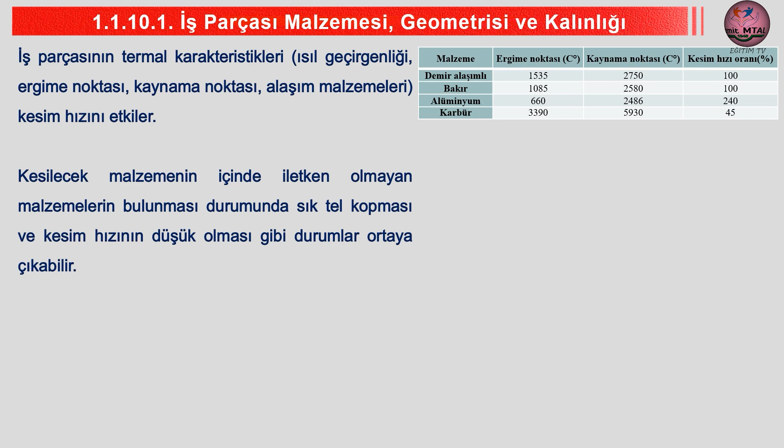İş parçası malzemesi, geometrisi ve kalınlığı ile iş parçasının termal karakteristikleri kesim hızını etkiler. Kesilecek malzemenin içinde iletken olmayan malzemelerin bulunması durumunda sık tel kopması ve kesim hızının düşük olması gibi durumlar ortaya çıkabilir. Demir alaşımlı malzemelerde kesim hızı yüzde 100 kabul edildiğinde diğer malzemelerin hız oranları tablolardaki gibidir.

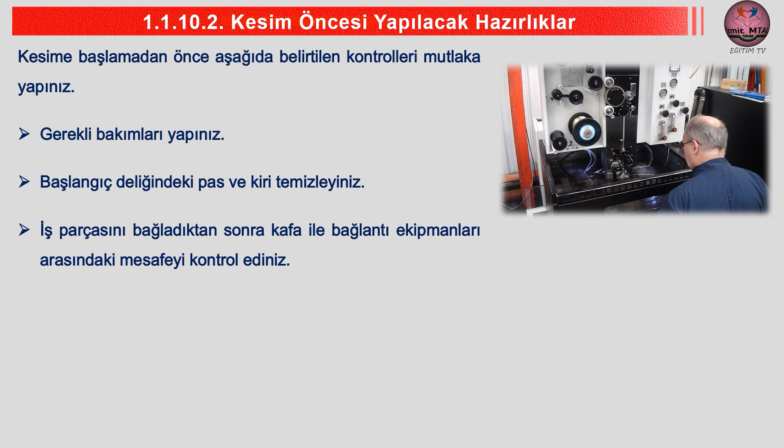Kesim öncesi yapılacak hazırlıklar. Kesime başlamadan önce aşağıda belirtilen kontrolleri mutlaka yapınız. Gerekli bakımları yapınız. Başlangıç deliğindeki pas ve kiri temizleyiniz. İş parçasını bağladıktan sonra kafa ile bağlantı ekipmanları arasındaki mesafeyi kontrol ediniz.

Kullanılacak kesim şartına göre uygun nozul türünü seçip iş parçası ile alt nozul arasındaki mesafeyi ayarlayınız. Kafaları başlangıç noktasına alarak telin geçip geçmediğini kontrol ediniz. Z eksenini pozisyonlayınız ve mutlaka limit koyunuz. İş parçasının koordinatlarını ayarlayınız.

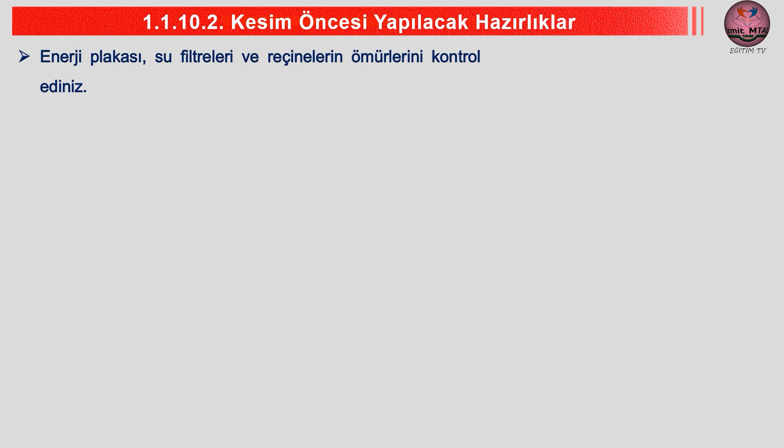Enerji plakası, su filtreleri ve reçinelerin ömürlerini kontrol ediniz. Tank seviyesini cetvelden kontrol ediniz.

AC Function menüsünde uygun tekrar deneme ve RWB modunu seçiniz, elektrik koruma durumunu kontrol ediniz. Elektrik kesintisi durumunda tezgah açıldıktan sonra makine referansına gideceğinden, bu hareket esnasında kafaların iş parçasına ya da bağlama ekipmanlarına çarpmayacağından emin olunuz.

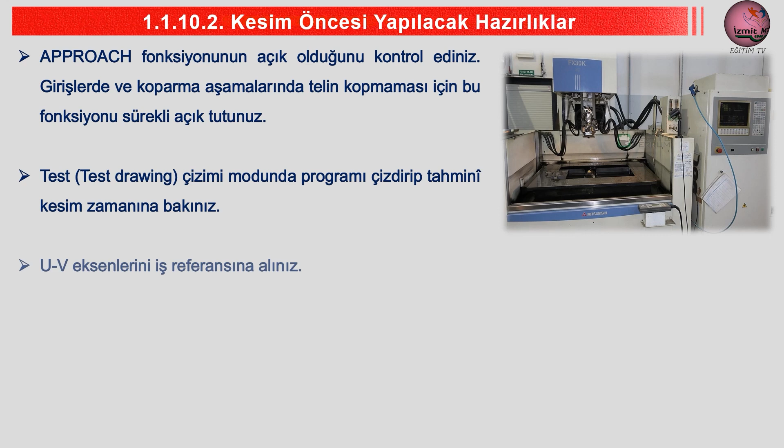Approach fonksiyonunun açık olduğunu kontrol ediniz. Girişlerde ve koparma aşamalarında telin kopmaması için bu fonksiyonu sürekli açık tutunuz. Test çizimi modunda programı çizdirip tahmini kesim zamanına bakınız. U ve V eksenlerini iş referansına alınız.

Hafıza konumunda çalıştırılacak programı çağırdıktan sonra kesim izleme menüsünde grafiği çizdiriniz. Kesmeden çalışma modunda programı çalıştırıp kafaların hareketlerini kontrol ediniz. Eksenleri belirlenen referanslara alınız. Tüm bu hazırlıklar ve kontroller tamamlandıktan sonra programa start verilebilir.

İş parçasını hazırlama ve bağlama. Tel erozyonda hassas bir kesim yapabilmek için iş parçasını uygun şekilde hazırlamak gerekir. Kesim esnasında ortaya çıkabilecek gerilimlerden dolayı parçanın dönmemesi için önceden tedbir alınmalıdır.

Nozul çapını ve bağlama payını göz önüne alarak iş parçası malzemesini hazırlayınız. Malzeme kenarı ile işleme yolu arasında 10 milimetrelik bir boşluk bırakınız. Gerilimin neden olduğu problemleri engellemek için daha fazla boşluk bırakılmalıdır.

Ön delik çapını gerekenden daha büyük yapmayınız. Delik iş parçasına dik olmalıdır. Delik içindeki pas, toz, çapak ve benzerini temizleyiniz. Bir kural olarak her işleme için bir delik hazırlayınız.

İnce bir profil işlendiğinde, koparma parçası kalın olduğunda ya da malzemenin geriliminin alınması istenildiğinde, farklı işlemeler için çoklu başlangıç delikleri hazırlanmalıdır. Ağır iş parçalarında önceden hazırlanan kılavuz deliği ile malzeme çektirilerek taşınabilir. Böyle bir işlemde çektirme aparatı takıldıktan sonra tel kopma durumu olduğunda nozulların bu aparata çarpacağı göz önünde bulundurulmalıdır.

İş parçasını tablaya, gerilim problemi yaratmayacak, su basınçlarından dolayı yer değiştirmeyecek ve malzemenin ağırlığını taşıyacak şekilde bağlayınız. Bağlantı plakasının yüksekliğini mümkün olduğu kadar kısa tutunuz. Ayar cıvatalarının nozullara ve kablolara zarar vermemesi için mümkün olduğunca kısa bağlayınız.

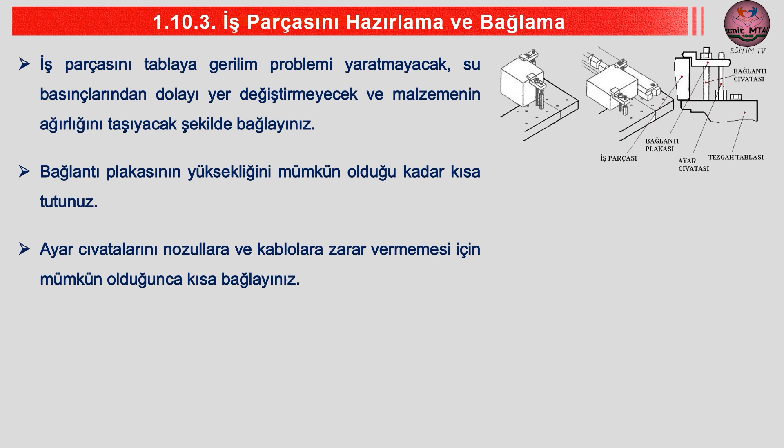Kalıp plakası X ve Y referans eksenlerinde doğrultma yapılarak plaka tezgah tablasına bağlanır. Tezgaha bağlantısında komparatör kullanılarak dikliği ve paralelliği kontrol edilir.

Makine referansı, makine orijini ve iş referansı. Makine koordinatı tezgahta bulunan eksen switchlerine bağlıdır, değiştirilemez. İş tablası üzerinde herhangi bir noktaya yeniden gelindiğinde makine koordinat değeri de aynı olacaktır.

X, Y, Z koordinatları her zaman aynı olmakla birlikte, U ve V koordinatları diklik ayarı yapıldıktan sonra bir miktar değişkenlik gösterebilir. Her bir program için X ve Y iş koordinatlarının 0 olduğu noktadaki makine koordinatını bir yere not etmekte fayda vardır. İş koordinatlarının yanlışlıkla değiştirilmesi durumunda kaydedilen makine koordinatlarına gelinip yeniden sıfırlama yapılabilir.

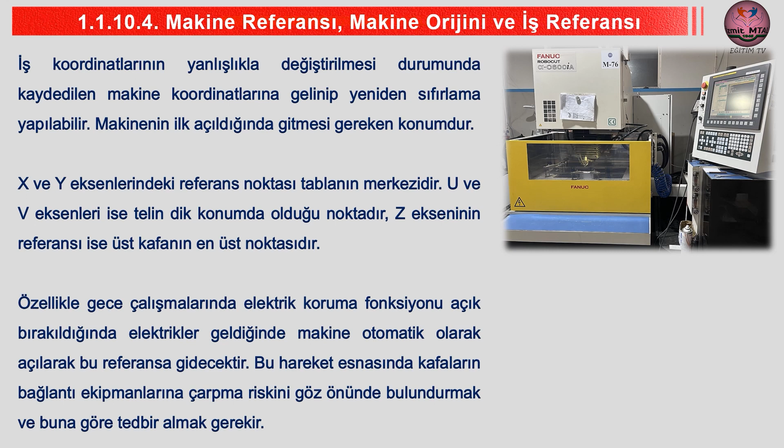Özellikle gece çalışmalarında elektrik koruma fonksiyonu açık bırakıldığında, elektrikler geldiğinde makine otomatik olarak açılarak bu referansa gidecektir. Bu hareket esnasında kafaların bağlantı ekipmanlarına çarpma riskini göz önünde bulundurmak ve buna göre tedbir almak gerekir.

İş koordinatı: işlenecek malzemenin NC programı hazırlanırken öncelikle eksen hareketlerinde referans alınacak olan bir sıfır noktası belirlenir. Makine tablası üzerinde de tayin edilmesi gereken bu nokta iş referansı olarak adlandırılır. İş koordinatı ise bu noktanın sıfırına göre görülen sayısal değerlerdir.

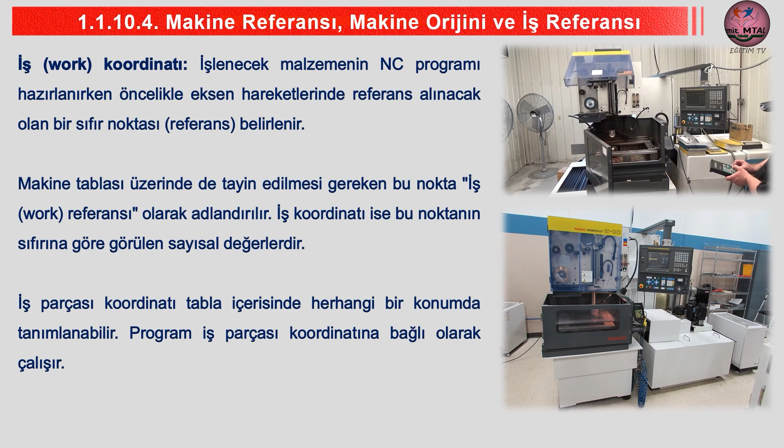İş parçası koordinatı tabla içerisinde herhangi bir konumda tanımlanabilir. Program iş parçası koordinatına bağlı olarak çalışır. Hazırlanan NC programındaki komutların referans alacağı noktadır. Her bir program için ayrı bir referans noktası tanımlanmalıdır.

Tel istenilen noktaya geldiğinde, bu noktadaki X, Y ve Z koordinatları sıfırlanarak iş referansı tayin edilmiş olur. Makine ilk açıldığında makine koordinat sistemi tanımlanması gerektiğinden eksenler mutlaka makine referansına gönderilmelidir.

Ölçü koordinatı: tel malzemeye dokunarak kenarı, delik merkezini ve benzerini bulabilir. Bu tür pozisyonlamalarda telin malzeme üzerinde dokunduğu iki nokta arasındaki ölçü bu koordinattan okunabilir. Özellikle dişi kalıplar kesildikten sonra istenen ölçünün elde edilip edilmediğinin kontrolünde kullanılabilir.

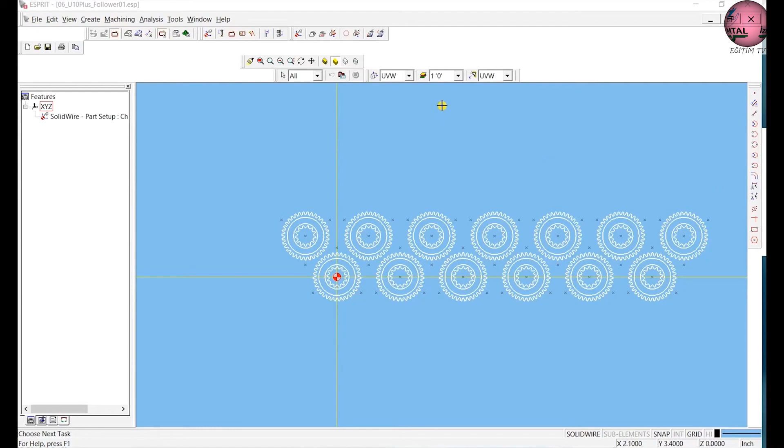So this is the part we're going to cut, a handful of gears. What's interesting about this one is I have teeth on the inner ring and teeth on the outer ring. I broke this up into 3 different programs: the inner ring, the outer teeth, and then the cutoffs. I'll show you how this is set up, and then we'll take this over to the machine.

So the first thing that we're going to do is the inner ring. I'll just open it up. I've already done it, so this is the inner cutout. I don't need to save. For the inner cutout, I'll just come over to how I have it.

So we'll do all of the roughing passes, and then what we'll do is come around and do the cutoffs. So you'll see the cutoffs here. Basically all I did was, I'm happy with this. This is what I'm going to run, and this is what I exported.

The next thing we're going to do is the teeth profile on the outside. Give it a second to load. This one runs a little slow because there's actually quite a bit going on. With this one I broke it up into segments, and I used open right and open left rather than full contours.

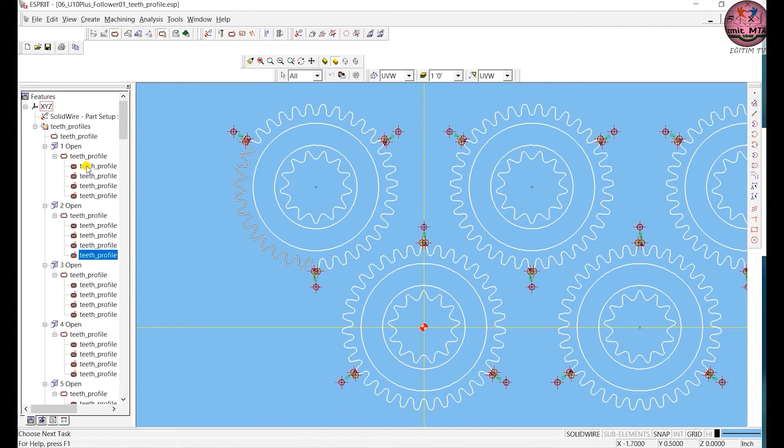And then I just had 3 cutoffs. This way, with these gears, I don't actually need to glue them in place. I'll just come back and do the cutoffs. So this is the second file that I outputted, and then the last one is just this cutoff.

Here you see I just come around and cut off each one. I'll take you over to the order. So boom, boom, boom, that one would be free, and then I go on and so forth. So these are the 3 programs that I outputted, and now we'll take it over to the machine.

So we are going to be cutting this part today. Once again, the first thing that you do, as always, once you're going to operate and move the machine, is you come over here and turn on the pumps. Once again, you see this deionization message. That's fine, that's just because it's getting up and going.

So we're going to come over here, raise up the water so the seals are lubricated. Turn on the light. And once again, the first thing that we're going to do is clean up the table.

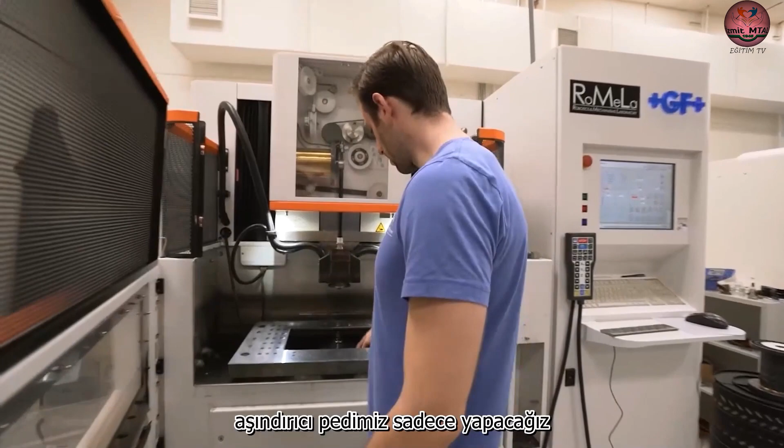So we're going to wet our abrasive pad. We're just going to lightly scrub down the entire table, getting any residual material off of there. And we're going to spray it down.

So I'm going to set up the part on this side. What I'm going to do is move the head out of the way and kind of raise it up so I have as much space to work as possible.

So the next thing we're going to do is grab the holders for securing your part. You'll find them over here in this cabinet. Wire EDM tooling, they'll come in this box.

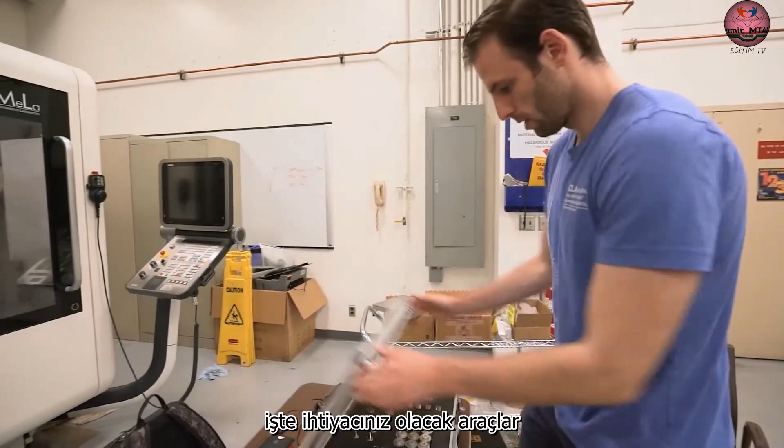So here is the tools that you'll need. When you use this, please make sure you put everything back, especially these hex keys which go with this, and keep it organized and dry.

So what we're gonna do, mainly what you're gonna use is parts like these. You need to know how big your part is. This lip will help you secure it, but notice how the part is bigger than that, so we're actually gonna secure it this way.

So now what we need are bolts that will be able to bolt into the table. That one will be able to go past, so I'll take two of those, and then you also need the appropriate part to pin it down.

Now we're ready to secure the part to the table. So I'm going to position it across there.

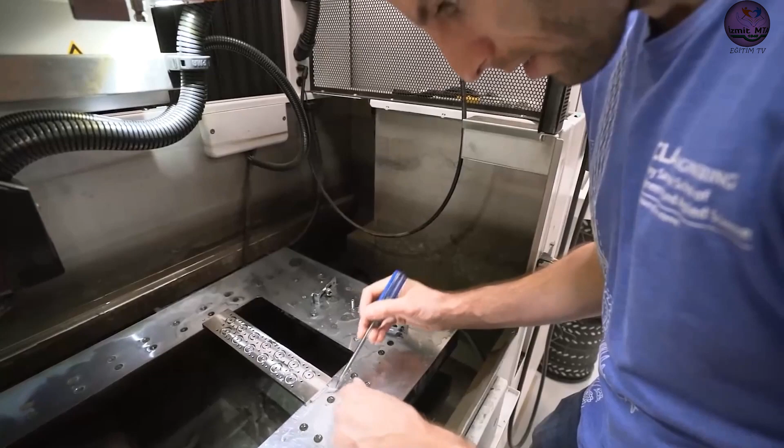This is where we're going to screw the part into, and they actually have these little protector studs. What these do is they prevent material buildup on the threads so that we can continue to use these holes. They look something like this. When you take one out, we've lost some of them, so just place these in an open hole.

So what I'm going to do is secure the first one. All I'm going to do is get the thread started, kind of get it to where it would be level. And then so we don't scratch up the table, we put this protective layer under the back thread.

So what you want to do is get it so that the clamp is essentially level with the part, and that's where you want to tighten this down. Wait until it gets level, and then tighten the first one, the front one, and then slightly tighten the back one. That gives a kind of pinching pressure to it rather than lifting off.

And so now my part is secure. You don't need to wrench on it because there is no cutting force with this. So now we're going to do the back one.

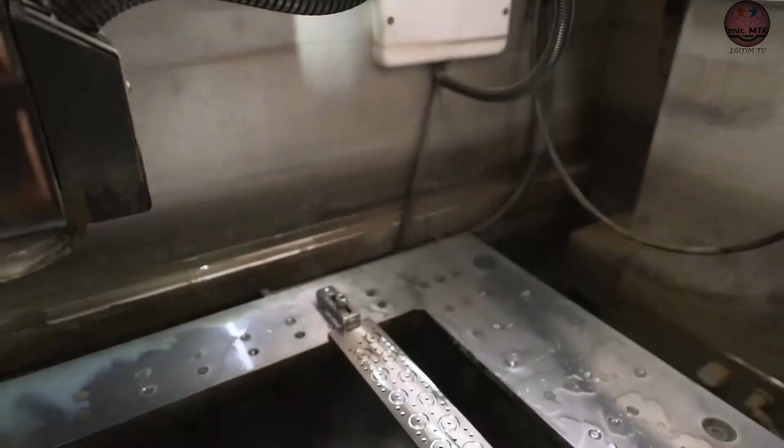Okay, so now my part is in there secure, and we're good to go.

Just a note on clamping your part: this is very dependent on how big your part is and how well it needs to be secured. If you have a flimsy part that flaps quite a bit, you'll have to hold it tighter. If you have a bigger part that weighs quite a bit, you might need three or four spots. This is all kind of dependent, but make sure that whatever you're clamping, the connection to the table is complete. If you don't complete the circuit, you're not going to be able to cut.

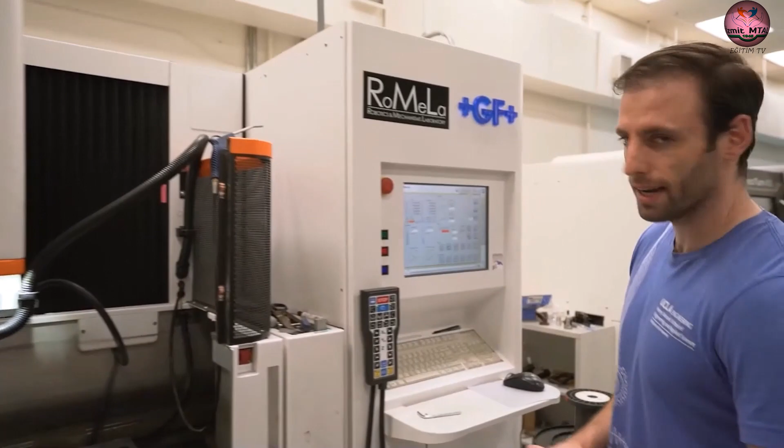So now what we need to do is find the part. The first thing that I do is you'll see here the rot number, and what this is showing is that there's a rotational offset.

So the very first thing that I do is I zero this out just to make sense in my head. This is an MDI rot, the coordinate system that you want to zero out, and then zero. So if I run that, it'll go to zero, and we're fine there.

So now the first thing I'm going to do is find the origin of the part. If you did a part system setup, you need to make sure this is the same as that. If not, you just need to find the spot where the wire is going to start in your part program.

So I'm going to go over generally where the hole is. Sometimes it can be kind of hard to find where the hole is, so I'm going to give you a little trick that helps out.

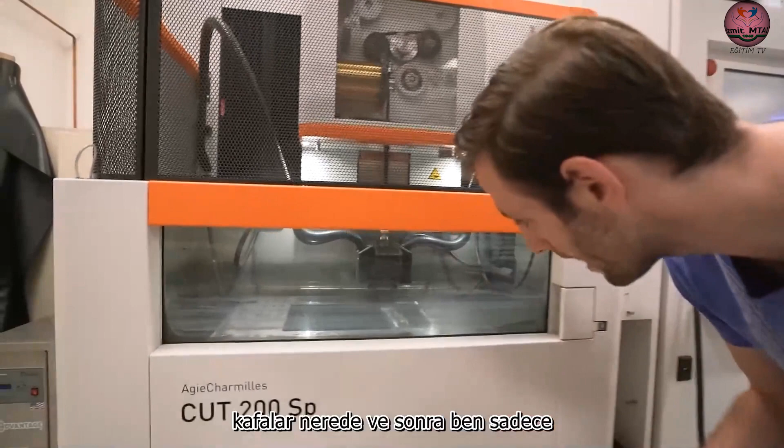We're going to close the door, and then I'm going to turn on the jet. That's going to let me know where the head's at, and then I'm just going to move it until the jet is in the hole that I'm aiming for. So there we go. That might have been hard to see, but hopefully you understood what I was doing.

So now when I do the thread, the jet will also go through that hole and I'll thread in the correct hole. One way of knowing if the threading is not performing well is you'll see this cantilever bar start bouncing if you're not threading very well.

So what we're gonna do is go over to the measure tab, but first I'm gonna turn on the chiller, because you want the measurement to be done in the same kind of setup as you're cutting. You'll get higher tolerances. Now we're gonna come over to the measure tab, and I'm gonna do a center finding.

With center finding, there's a couple different things you can do. The top one is what coordinate system you want to set, and we're gonna do the part. The next one is how many touches do we want to have. I typically do 5, but you can do however many you want. Technically, to find the center of a circle, you need at least 3. You can even change how many degrees apart - I'll do evenly spaced at 72.

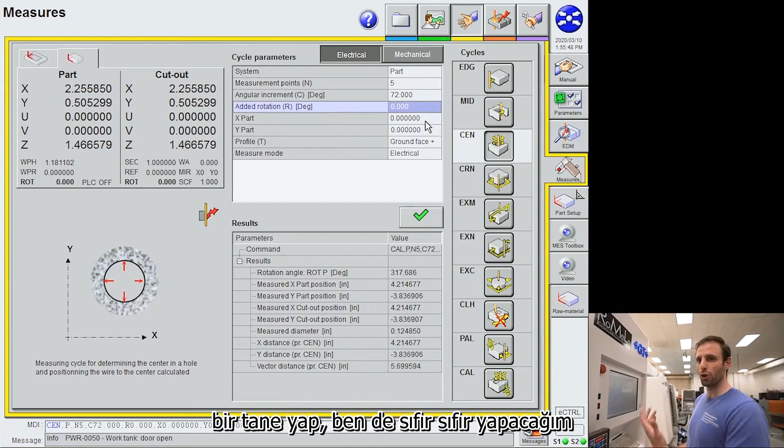This is asking how much rotation do I want to add, and we're going to add none. Then this is asking what point do I want this in my coordinate system. So if I put this as 1,1, when it finds it, it'll do 1,1. I'm going to do 0,0 because I want this to be my origin. And then this is what sort of profile you have.

Ground face plus means that it is accurate - basically you have a grounded off surface that's accurate, and if it finds a point that's out of tolerance, it'll actually not complete this task, telling you that you have a problem. If you have a rough face or a rusty face, choose rough or rusty, and it'll just do a best fit and try its best, and it will never fail. We're gonna do ground face plus because this is an accurate hole, and we're gonna hit go.

So now we're in the program, it's going to fill up with water. You're gonna see the wires start to go. Once the program starts going, you'll see the machine start moving, and this edge will flicker on and off. This means it's touching the edge and finding your part. This is gonna take a couple of minutes to run, and if it doesn't complete, you'll see an error, or you'll just see that you're at 0,0 and the part will be out.

All right, so now we found the center, we've basically found our origin. The next steps are, first you want to cut it so that when you move the machine, you don't just drag the wire into the part. So we're going to cut it, come back over to manual, and lower it down.

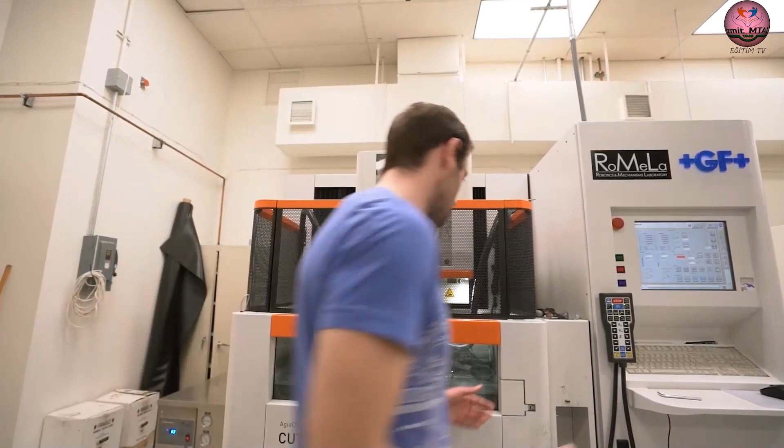What we're gonna do is, I know these holes are in a line, so I'm gonna find this last center hole over here. Once again, I'm gonna move over there. I actually have a small stream of jet of water, so I kind of know I'm in the right spot. Actually, I'm going to back up - I'm going to give it the big jet. Make sure that we're lined up. That looks pretty good to me. We're going to thread it.

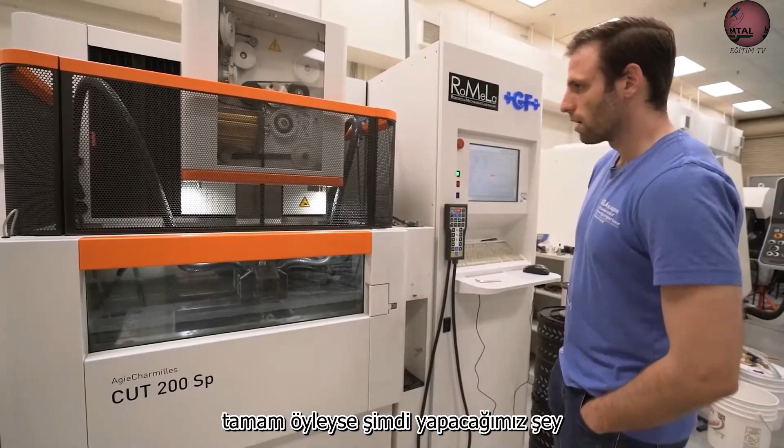Okay, so now we're gonna come back over to the measure, and we're gonna go to the CAL - this is to be performed after you do a centering, and what this does is find the angle between the line linking the two center holes. Once again, we're gonna do part, 72 degrees in between, and once again we want 0 added rotation because our x-axis and our part coordinate we want lined up with the x-axis of this. So this is going to tell us how far to rotate our x-axis, and we'll do ground face plus.

So we'll give that a go. Once again, we're in the program, and this is going to perform exactly how the center finding went, and now at the end of this we'll see a number in the ROT column.

All right, so the cal just finished, and what you'll see here is in the ROT, it's 269.965 degrees, almost exactly 270, which makes sense because basically we had a negative 90 degree rotation. So everything feels good, we're gonna continue on.

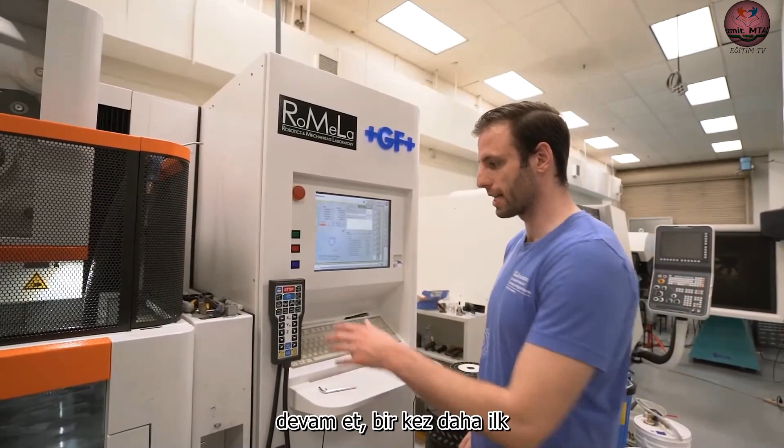So once again, the first thing to do is cut the wire so that I don't drag it into the part. I'm gonna lower the tank down. And then what I'm gonna do is move this back to 0, so I'll just use that quick key of move, and this will take me to my 0 position. Lower this down.

Okay, so now, right before we're ready to start programming our part, you want to set your height right. I'm not going to set my nozzle right on the surface, I'm going to set it right above where it won't interfere. So I'm just going to eyeball it, come in here, and make sure my head will always clear anything. I'm happy with this, so this is basically the setup I want for the start.

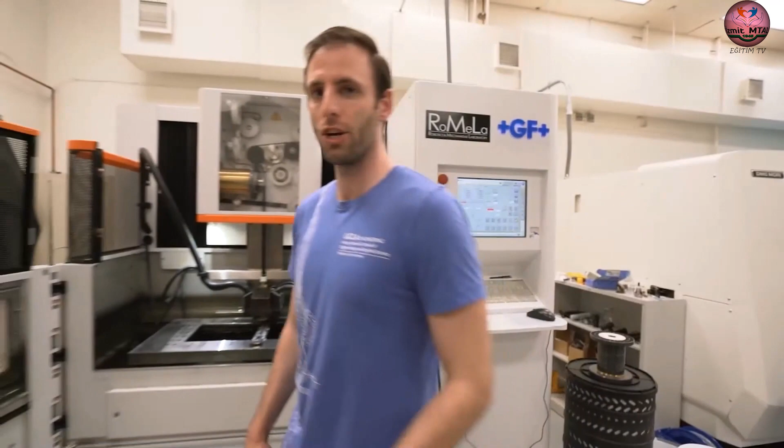So I'm going to come over here and hit SEP1CP. What this does is set up my point 1, which is basically where my origin is. So now we're ready to set up the part, or set up the program.

So you take the flash drive that you added your ISO files to, and insert it into the flash drive slot over here. Now we'll use these other two tabs. Come to your file manager, and you'll now see the flash drive is there in the F. I'm going to import everything from the 06 folder that I have. Never run anything off of your flash drive, always copy it and bring it onto the user drive.

So I already have a folder set up for me, and I'll just go through this. I'm going to add it here, so now paste it here, and now here's my 06. This is what we're working out of.

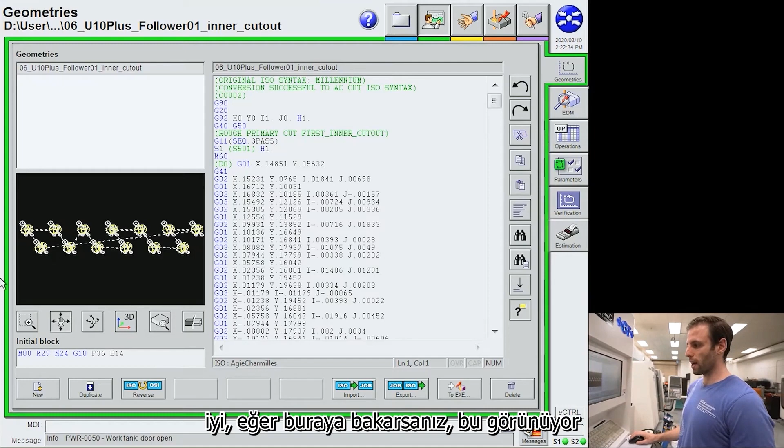Now I'm going to add the first file we're going to do, so the inner cutout. I'm going to import that. That's going to come in, and what you should see is no red. Everything looks fine. If you look over here, this looks like what we want to import. You can even zoom in to make sure everything looks okay.

Now we're going to import the other files we're also going to be using. Come over to this new—oh sorry, not new, that would literally let you create your own G code, we don't want that, so delete that. We're going to come over to import again, and select the next one we want to do, which is in the 06 folder, and we're going to do the teeth profile. Import.

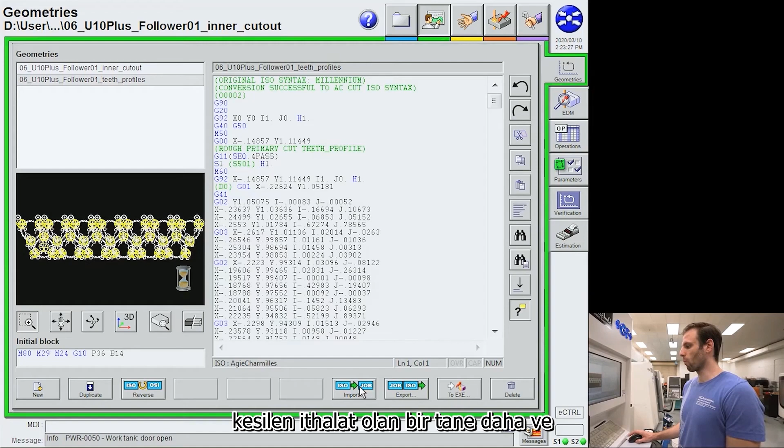It takes a little bit to import. That comes in, and that looks okay, the picture also looks okay. So we're going to import one more, which is the cutoff. Import. Now we have all three imported, you'll see them up here.

So now basically we're going to go in order of these tabs, that's what we're going to do to create it. The first thing we need to do is create the tech files. If you remember, we talked about them when we were doing this on the Esprit side. We need to match it up on this side.

So this is kind of your GUI to create a tech file. The first thing you want to do is select the material you're working with. If you're working with steel, there's steel and steel plus, I typically go with steel plus. Then you want to go with your part thickness. It doesn't exactly allow you to go too low with the part thickness, so with mine, it's less than a quarter inch, so we're going to put 0.2. If you have thicker material, it's good to put the exact amount.

Over here is a filtering of which tech files you're allowed to select from. I zero everything out just so I can see them all. Below is the selection of tech files you can use, and here is the type of wire we're using, which you typically won't change. Here you can select through all the different tech files. Over here, NBP is the number of passes, so we need to create a 4-pass, a 3-pass, and a 1-pass. So that's what I'm going to do first, create this 4-pass. I only have one option, so that's what we're going to do.

So I'm going to do generate. This is very important - you have to name this exactly what we named it in the Esprit file. So, 4-pass. And then I'm going to do validate. So now this creates my 4-pass file.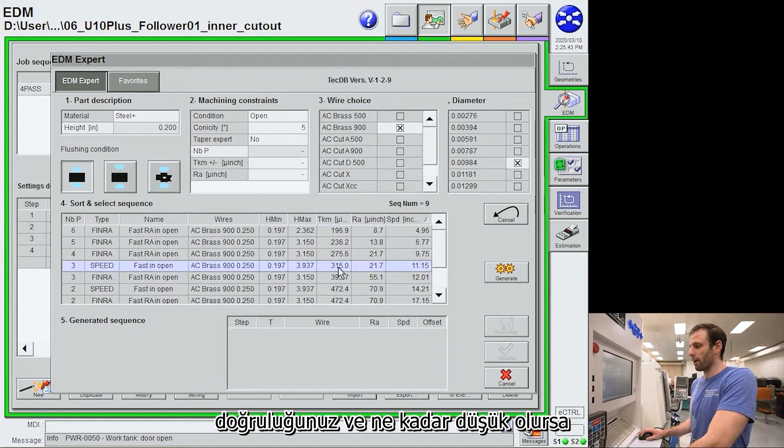And then I'm going to create our 3-pass. So I'm going to come back in here. Now you notice I have 2 options for my 3-pass. The differences are in the TKM, the RA, and the speed. TKM is essentially your accuracy - the lower the number, the better. The RA is your surface finish - once again, the lower the number, the better. And the speed is your surface speed, so the higher it is, the better.

If you notice between these two, one basically is more accurate but slower, and the other is less accurate and faster. I'm going to choose the slower but more accurate run. Generate, and then name this 3-pass. Okay, we're going to do that. And then the last one is the 1-pass. So I'm going to come in one more time and select 1-pass. This one honestly doesn't really matter which one you pick.

Okay, so now the next tab is the operations tab, and what we're going to do here is set up our op organizer. Essentially we're telling the machine the order of operations we want. So first I'm going to choose my inner cutout - that's what I want first. And then I'm going to select MP, which means I'm doing multiple passes.

I suggest always checking this. If you're only doing 1 pass, this has no effect. If you're doing multiple passes and you forget to turn this on, it can have pretty bad effect. Now you need to tell it which tech file you want to use, and for the inner cutout, we're doing a 3-pass. Then we're going to add another file - this will be the next thing we want to do.

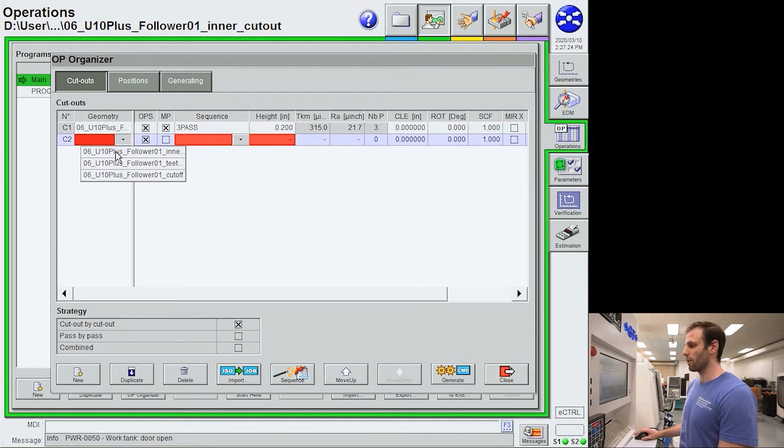This is the teeth profile, and we're going to do 4 passes. And then the last one is we're going to do the cutoff, and we're going to do 1 pass.

Now what I do is come over to positions, and this helps organize things and makes it so I can move the machine wherever I want, and the part always runs correctly. If you don't do this next step, you need to make sure the machine is at the right position when it starts, basically where it thinks it's going to thread, or else it's just going to cut the profile exactly how it is and not move to the right spot.

So what I'm going to do is tell it basically where the origin is, and this is going to be that point 1 that we created. So if you do that SEP1, you can do this. All right, so now that we've set all the points to point 1, I'm going to do generate, and this basically generates a bunch of code that organizes and makes sure the part programs run in the order we want.

The last thing we want to do is come down to this verification tab, and it takes a little bit to load, but essentially this displays what our part program will look like. Okay, so there, now we can kind of see the outline, and what we want to make sure of is that nothing is outside of the boundaries. Honestly, this takes up quite a bit of resources and can be pretty slow. But one good thing is that this is lined up the way we want. Everything looks good - we should be feeling pretty good at this point.

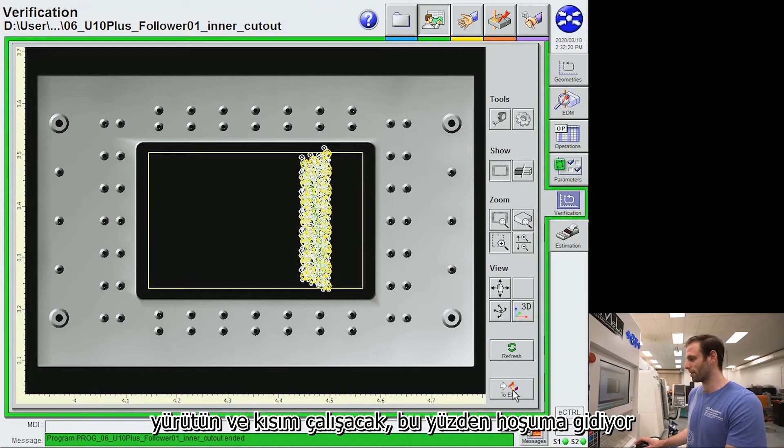So this is taking quite a bit, so I'm just going to go to execute. The last thing is just hit execute and the part will run. I like to be on the information tab when I'm doing this. What I normally do is just zoom into the first point. Okay, and so now basically the program's waiting for us to go, and all we do is hit go, and it should start running.

And that's the whole process of taking your programs that you made from Esprit and getting them onto the part, onto the EDM, and making a part. So thanks for watching this video.

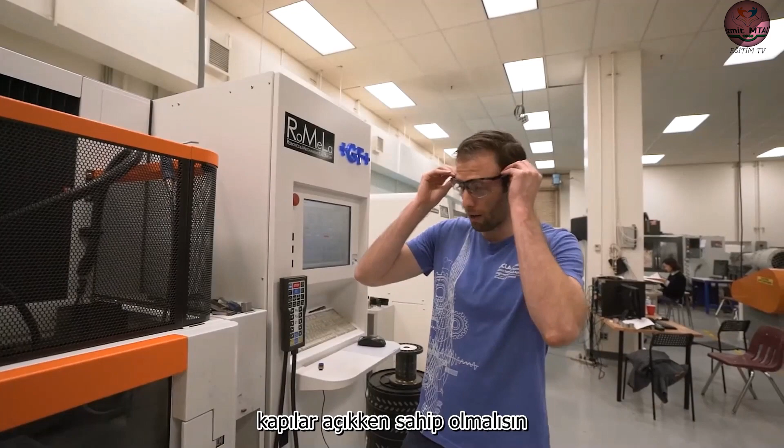Always use safety first, since there are quite a few moving parts on this machine and also electrical parts. Anytime you're going to be operating the machine while the door's open, you should have safety glasses on. Anytime the door's open and you're going to move the machine or do maintenance on the back, like greasing or anything like that, always make sure to use proper safety equipment.

So if you come over here, we'll look at the screen. This is broken down into 5 major categories, and then each one is broken down into 5 minor categories on the right.

The first one is the file manager, and this is where when you plug in your ISO files, this is where we grab them and load them on. I'll go into more detail on this in later videos when we go through how to cut a part.

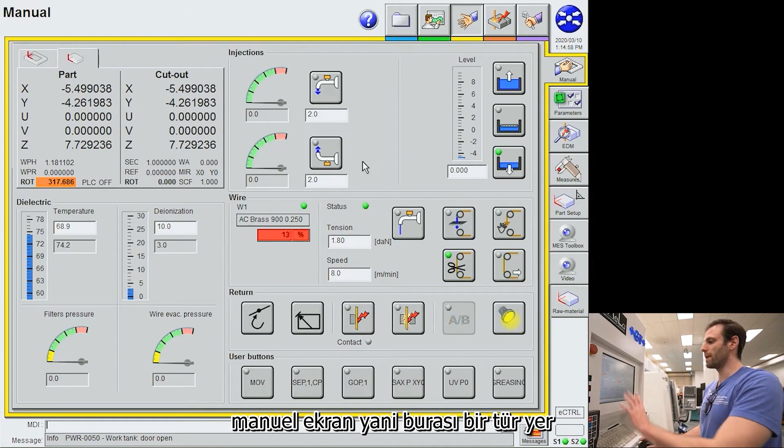The next one is where you go to build the MJB files once you load an ISO file. Once again, this will become clear in future videos. This video, what we're really going to focus on is the manual screen. This is where you get a general picture of the machine. You'll spend a lot of time here when you're not cutting parts, but when you're setting up.

The top left corner is your coordinate system, your part coordinate system, your cutout, and you can also switch to the machine coordinate system. You'll use these for setting up parts and kind of debugging.

The next one is your upper and lower injection, which applies high pressure jets. Once again, this is used for debugging, and I'll turn these on once we turn the water on.

The other one controls the level of the tank. Here you can see the temperature of the water, which we want to keep at about 70 degrees. This lets you know your deionization level, and while we're going, we want to keep that at 10. This lets you know how much wire you have left.

This is your panel for controlling whether the wire is cut, whether the wire is feeding. These are all manual controls. This is the pressure of the filters, which lets you know if the filter needs to be changed or not. And here are some user buttons that are useful.

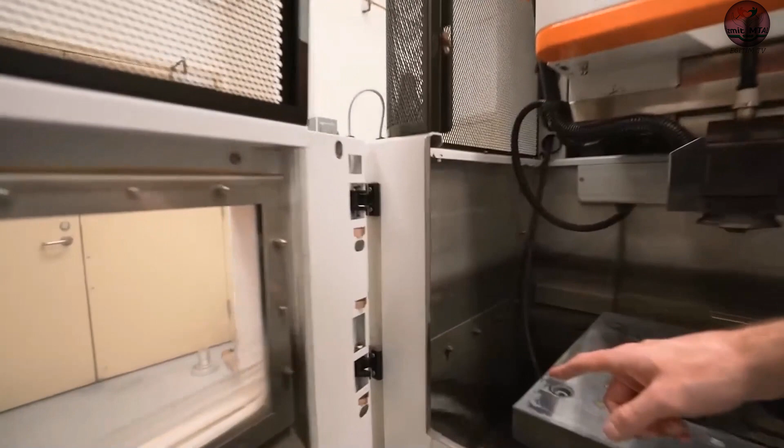So I'm going to start going over the normal operation. The first thing that we do is come over to this maintenance page. Most things on the maintenance page you will not be changing, but the first thing you do every time with this machine is turn on both of the pumps. Now we can hear both of the pumps running, and we can actually see that the pumps have turned on. Okay, so now we know that's working.

We're going to come over to the manual page, and oftentimes you'll get a deionization out of range, and that's fine. That's because the water's been sitting there stagnant, and it takes a little bit to bring the deionization level down. So the first thing we want to do is fill up the tank. This is the button that says bring the water up to the table, so you'll see that we can do that.

I'm also going to turn on the light in the tank, so that's this button over here. Now we have some light, and you can see that the water is up to the table. The reason why I did that before we did anything else is because when this machine moves, it actually has seals that are lubricated by the water. So if you don't have the water up, it will wear out those seals earlier.

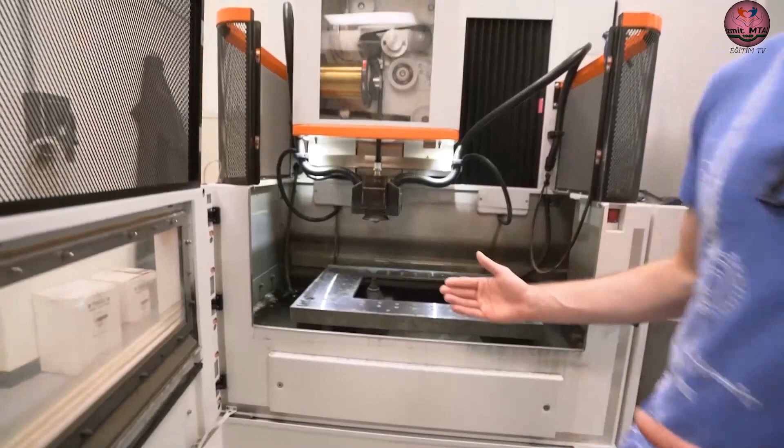The very first thing that you want to do is take this abrasive pad, wet it a little bit, and gently rub down the table. This keeps the table in pristine condition and keeps everything flat, which will help keep parts accurate. Once you do that, you can take this water gun and gently spray everything off, and that'll get any leftover residue on there.

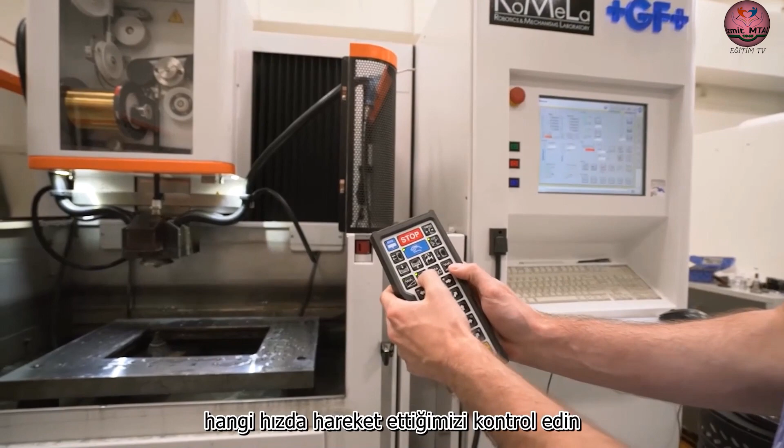Now just going over some manual control of the machine itself. So here we have the pendant, and this allows us to move the machine around. This will control what speed we move at.

Notice we can't go up to level 4. We can only go up to level 4 when the door is closed.

Here I'm going to go to level 3, and I'll move in the X direction. So this is the positive X direction, this is the negative X direction. Negative Y direction, positive Y direction. Negative Z, and positive Z.

So we're going to come down, and I'll go over some other manual ones.

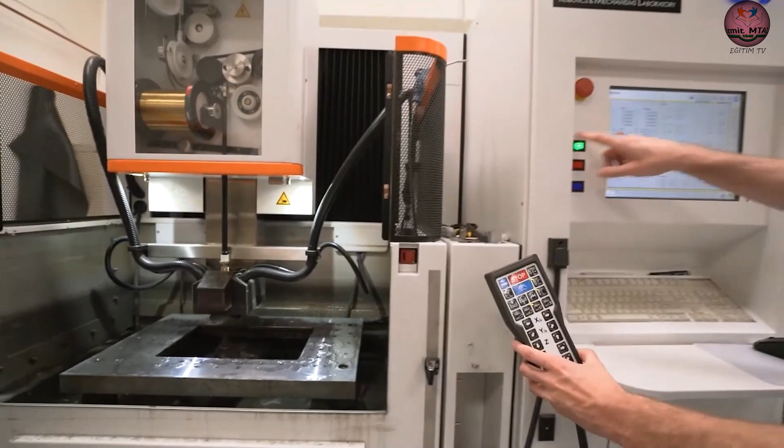What we're going to do is thread the wire, and we'll manually thread it by hitting this button here, the thread button. So we'll do that, and you'll see that the machine is now in a program, and that's the automatic threading program. Right now it's going, and you'll hear the high pressure jet turn on, which will help feed the wire.

So when that completes, this light will go dark, and we will have the thread light on. That means the wire is threaded, and we can actually see it. It might be hard to see on video, but there's actually a wire that's threaded right there.

So now, if we want to do the cut, we actually have to close the door. To close the door, give it a good shove and then lock it. Now that the door is closed, I can press the cut button. And once again, now we're in the cut program, and once it's finished, this will stay solid, meaning it's in the cut state.

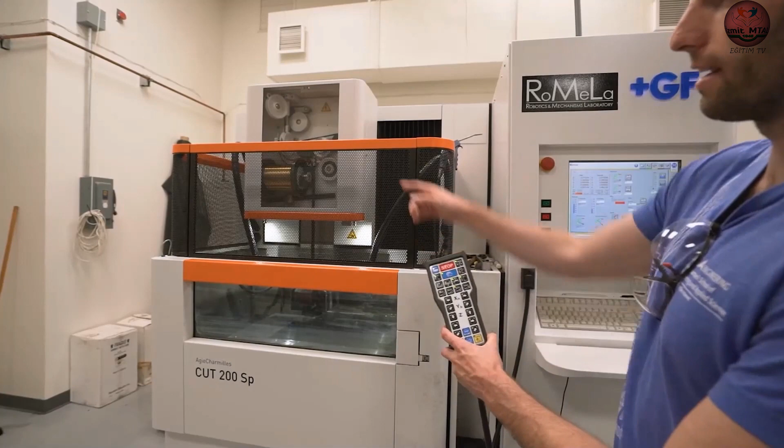Okay, now that it's threaded, if I hit this button, it'll just continue to thread the wire, and you see that the spool continues to spin. So that ended that. Okay, so now we'll come back over here, and we'll go over a couple operations over here.

So I think the first thing that I'll do is I will go over the operating buttons here. The first one is MOV, and what that is doing is it's going to take you to the part 00 position. So if you just hit MOV, you see that it just goes to the 00. So this is a random 00 position.

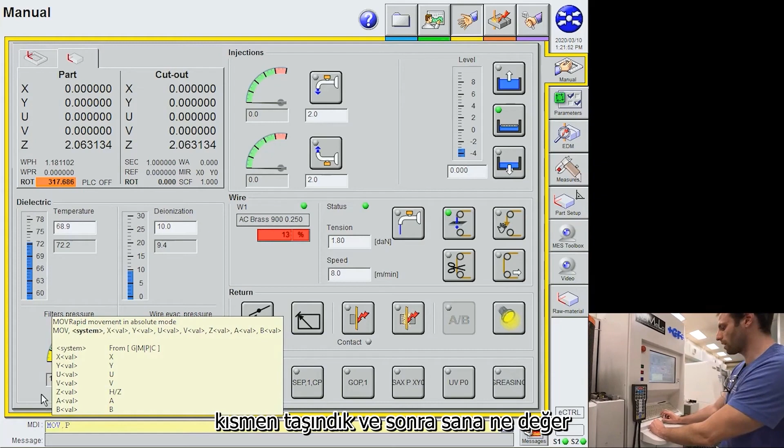And that is a hotkey for the MOV. So on MDI, the MOV quick function. What this is asking for is MOV, which coordinate system you want to move in. So we moved in part, and then what value you want for X and Y. So I'll go to X 1, Y -1.

And this button is a hot button for going to move MOV, comma, part, comma, 0, or X0, Y0. And that's all that's useful for, it's just kind of to help you get there faster.

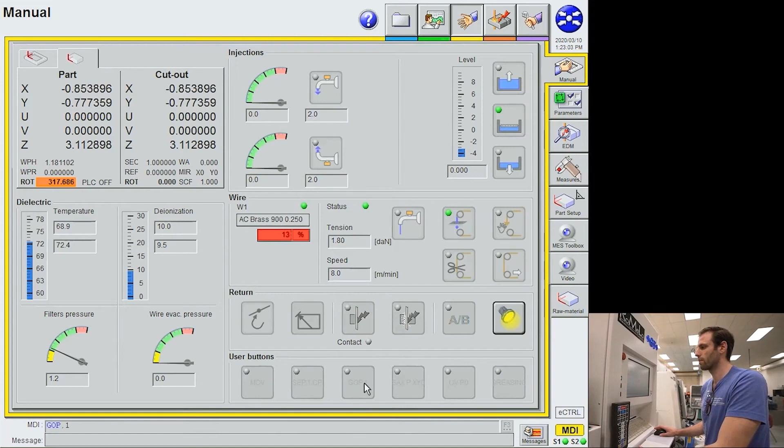SEP1CP is set point 1, and this will come into play when we're doing part programs. If I set point 1, it'll move to a random spot, I think it'll make it more obvious. So I'll say that this is my set point 1, and just to remember that my set point 1 is negative 0.85 in X and negative 0.77 in Y. Then if I just move to some arbitrary position and hit GOP1, it'll go to my set point. So now we're back to that exact set point. This is very useful when we're doing part setups.

We don't need to go over what SAXP is, but UVP0 is important. What this is, if your U axis is not aligned—so I just misaligned my U and V, notice that the coordinates changed—if you do UVP0, it'll realign them. This is useful because when you try and measure something, it'll ask you to realign them, and all you do is come here and press this button. And the greasing one, I go over in the greasing tutorial, so see that if you want more information.

The other hotkeys we can go over are—if I lower it, what I'm gonna do is, you have to have the door closed for this. I'm gonna raise the water level to the height of the head. This one wouldn't allow me to do it if the door had been open because it would spill out. It also doesn't allow me to open the door, it's locked, and it won't unlock until we bring it back down to the table. So now you can see that the water level has been raised.

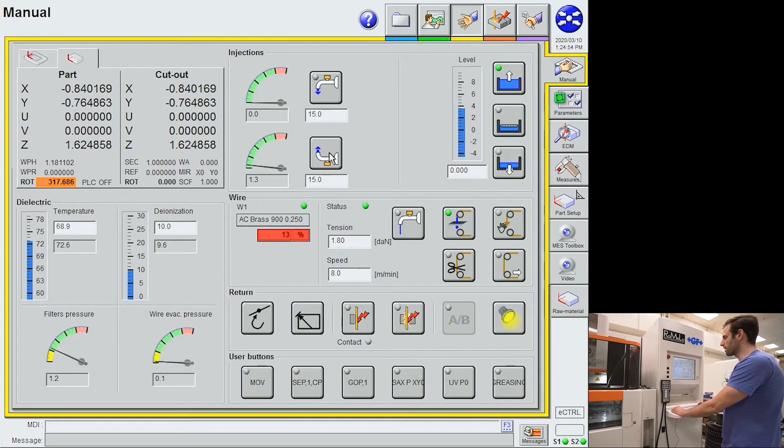Now what we can do is turn on the jets. This allows you to test what you want the jets to be at. So what this is saying is turn on the jets to 2 PSI. If I do that, it takes a little bit—oh sorry, they were turning on, I just don't hear them. The reason why I don't see any pressure is there's nothing in the way. These will measure, when you're close to a part, how much pressure it's seeing, and since there's nothing there, I don't see anything.

But you do hear it turning on, and you can see the water moving. This is saying I want 15 PSI coming out, so you can change this, but really there's nothing there right now. I'll show you how to do this when I have a part set up, so watch the video after this for part setups, and I'll go a little more into that.

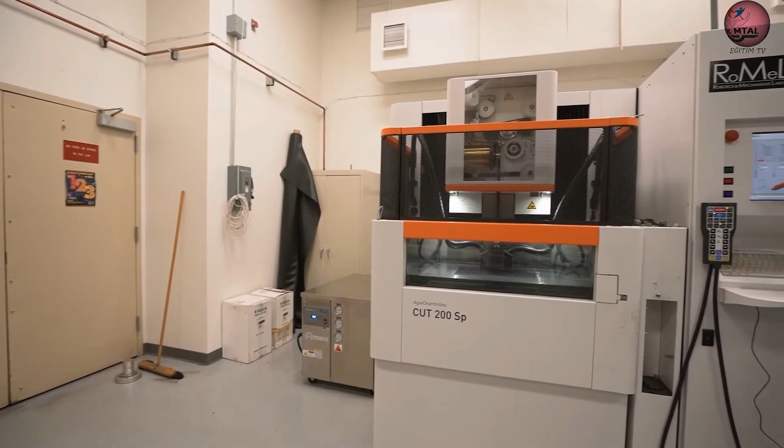So the temperature, we want to keep it at 70, and how we control that is we come over here to the chiller. We need to turn on the chiller, and we just hit this button. It'll make quite a bit of noise, and the chiller will run, and that is what keeps this at 70 degrees. If you forget to turn on the chiller, your part will actually scorch, and you will most likely break wires.

So remember when you're cutting to turn on the chiller. The other thing to watch is this deionization level. It needs to stay around 10. When you're cutting, it'll creep up a little bit, but once you see it start to go to 11 or 12, then we need to replace the resin in this tank back here. This tank is what does the deionization, and it's full of resin, and once you see it start to creep up, that needs to be replaced.

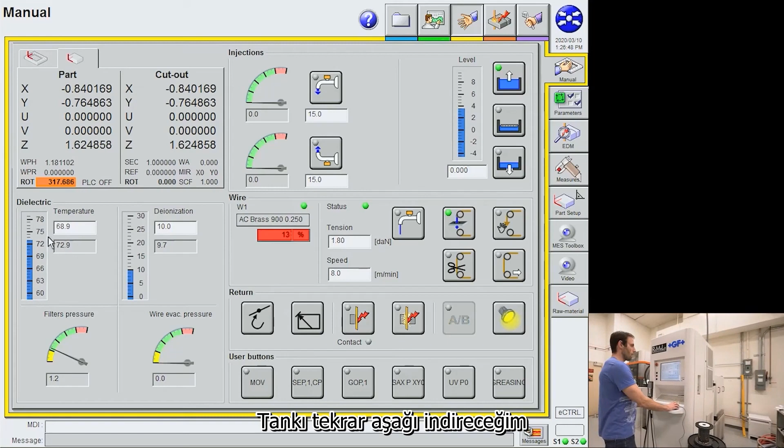So I'm going to lower the tank back down to the table, and when you hear a click, the door will open back up. That's also when this gets to 0.

So this is the manual page that we've been going over. You won't really use the parameters page, but you will use, the biggest one is the measure page. On the measure page, we have all sorts of different ways of basically finding your part. You can detect edges, center points, and stuff of that nature. In the part setup and part cutting video, I'll go over this in more detail, but honestly there's a lot of information here, and you can do corner finding, and all sorts of different things.

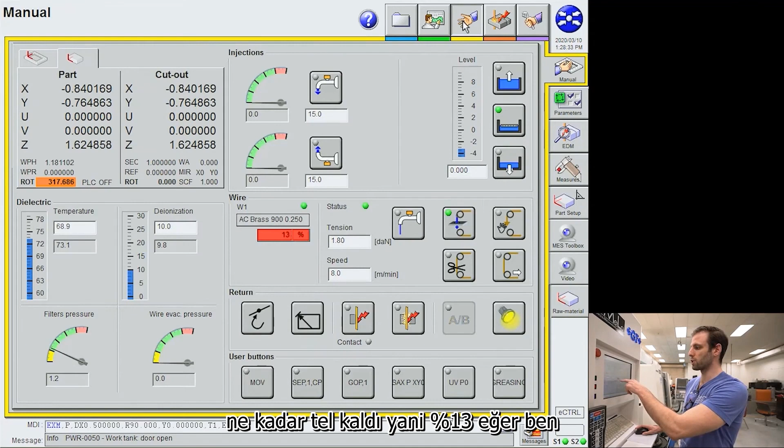Other than that, I think the only other page we'll use is this maintenance one a little bit, and that's to turn on the 2 pumps. And then, when you change out the wire, you want to update the remaining length to be equal to the full length, basically telling it how much wire is left, and that will be indicative on the front page of how much wire is left. So the 13%, if I had changed that to the full amount, that would be updated to 100%, and that just kind of keeps track of the wire.

Other than that, I think that's everything, and everything else I'll cover in the next video on how to cut a part. Thanks.

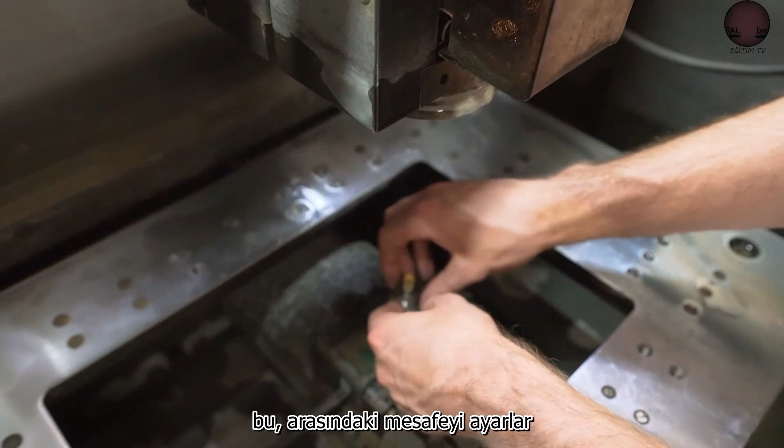First, we're going to take off the plastic nozzle on top. So this is just a plastic nozzle. Under the nozzle, there are two spacers, and these are actually custom for each machine and might change over time. What this does is sets the distance between the nozzle and the top of the table. These should be washed off and replaced.

And now you have this ceramic part that you need to be gentle with. It's actually just finger tight, so all I did was spin to the left, but be very careful. Underneath is the assembly of the lower nozzle, and it can spill out.

So sitting on top is actually the guide right there. You have these two parts that need to be cleaned and washed. I'm going to go set all of this on the table so that we can wash it later, and then we're going to do the upper nozzle.

For the upper nozzle, we're going to use this custom tool. First, we're going to use this side, which has two pins, which mates with the plastic cover on top. So we're going to use that.

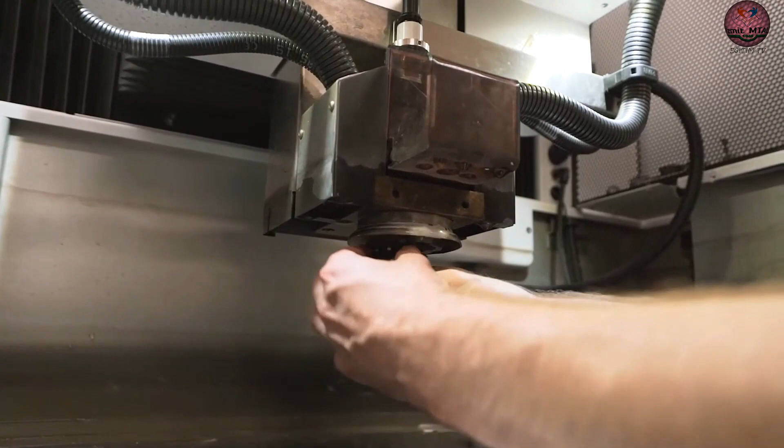Yeah, no, I'm going to need a pipe wrench. So to take this off, a lot of times the upper nozzle gets tight, and I like to use some sort of leverage, a pipe wrench or what have you.

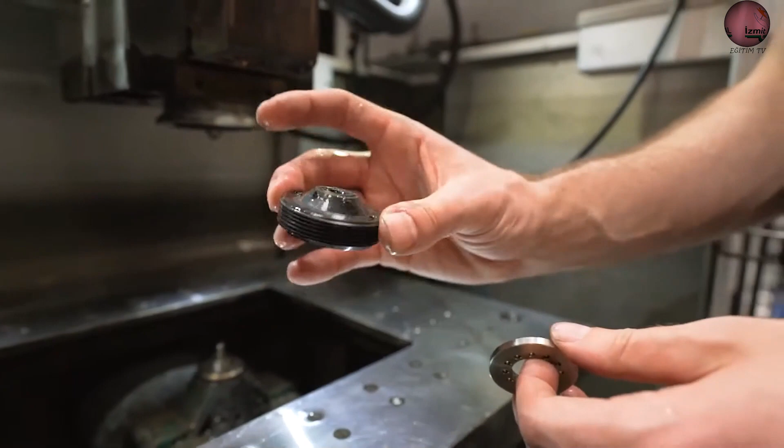So with this, two parts come off. The plastic nozzle, and then this is the diffuser that helps to align the jet of water that helps for threading. Now we still need to get the guide, and what we're going to use is the other side of this tool.

Basically, there's almost a nut up there, and we need to use this, and this will align with that nut. Once again, be careful because the guide itself is inside of here and is going to come with it.

Inside here is actually three parts that we're going to bring over to the table. Now that we have both nozzles sitting here, what we're going to do is go through kind of disassembly and cleaning of each one.

Up here we have the lower nozzle, and here's the upper nozzle. We still actually haven't taken apart the upper nozzle completely. There's actually four parts in here.

So inside of here, taking it out, this is kind of the housing for it. This is another diffuser, for making sure that the wire is guided through. This is the actual guide itself, and this is another housing.

Okay, so now what can happen, especially on the small guides, is they can build up material as the wire goes through, and so they need to be cleaned every once in a while to prevent wire breaks.

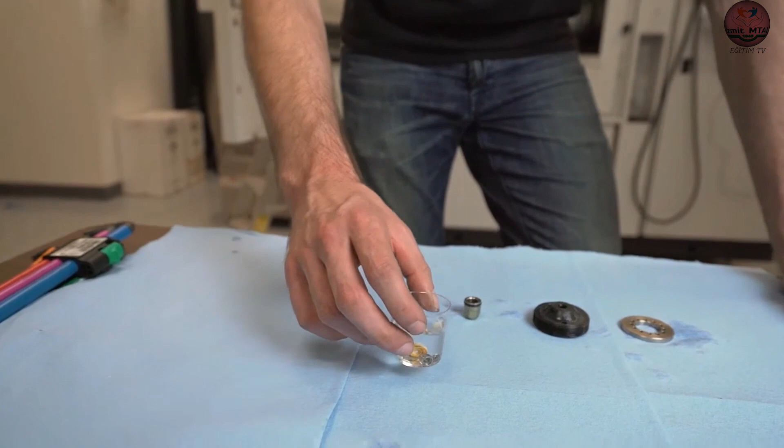And then I just blast water through to kind of loosen up any of the dirt. And then the rest of the parts just wipe off also with alcohol.

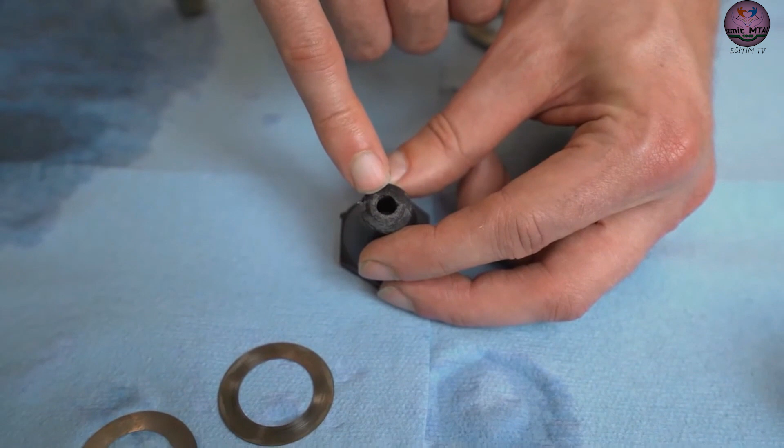Here you can see that this is getting pretty chewed up. This will actually start to affect the pressure that you get with clearing the wire. And that can start to cause problems on larger parts where the evacuation pressure is critical. These are pretty cheap and can be replaced pretty regularly.

Before putting the nozzles back, you want to make sure that you clean off the surface on the actual upper and lower head, just to make sure that they seat correctly.

All right, so one thing to remember, these little nozzles or guides all have basically an inlet to them, and what you need to remember is the wire always needs to be going in the concave section, not on the flat side.

So with this one, how the stack goes is the diffuser is on the bottom, and then the guide goes and sits nicely on the diffuser. And then the other housing kind of sandwiches it all together. So you have a stack like that.

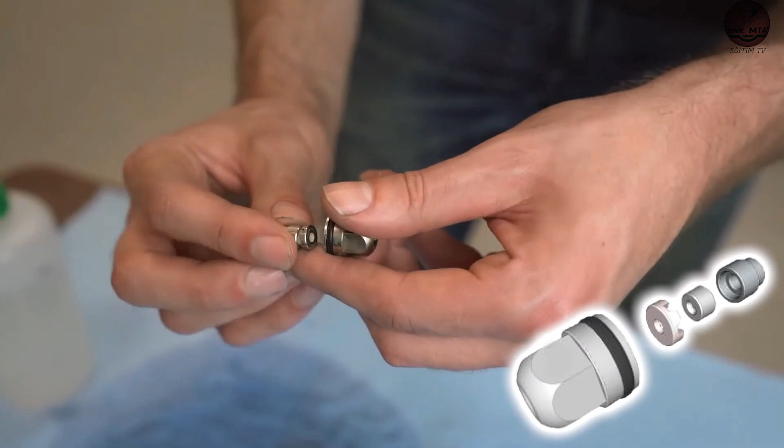And then the upper nozzle is going to sit like this, and in goes the guide. And what you want to see is it completely lying perfectly concentric with the outer housing. And now this is ready to go back on.

Same with this one, so you can see there's a small little concave part here. Once again, that should be aligned with how the wire is coming in. So this should also be pointing up, and then it'll sit inside of this housing.

So it'll pretty much sit like this, and this is ready to go back on. Now that we have the stack all put together for the upper, all you do is place it in there and screw it on. It doesn't need to be super tight, just do it kind of gentle, make sure it goes together nicely.

There is an O-ring that will start to engage, and you'll feel some friction from that. Once again, you don't need to wrench down too hard.

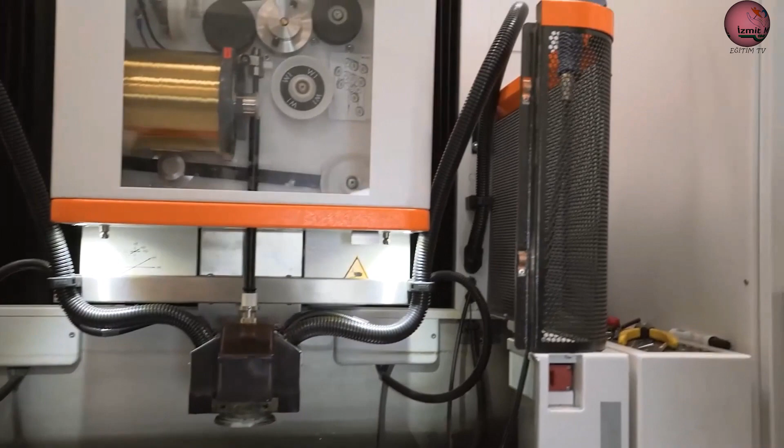Now the first thing to try, because if the diffuser isn't on there correctly or something's not aligned, the jet of water won't come straight. So the first thing to do is just do the jet of water. That's coming down nice and straight, which means everything in there is aligned and we're good to go to the next step.

Now we have the plastic nozzle and the other diffuser. Just place that back in there and screw this back on.

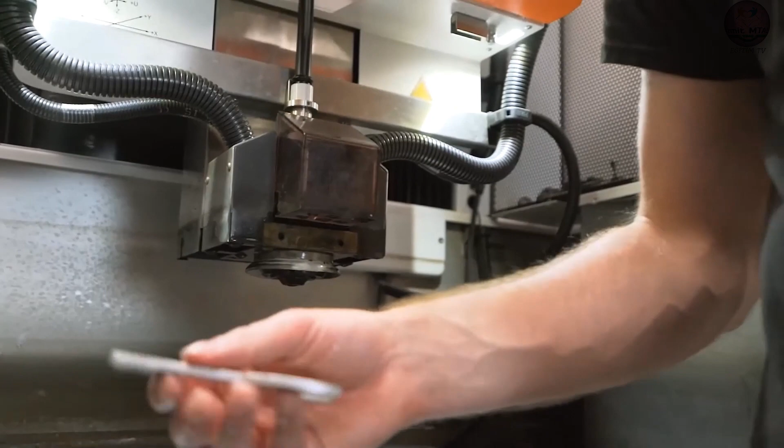Okay, so now the upper nozzle is back on, so we're going to put on the lower nozzle. There's a couple different ways to do this. You can either put this in first and screw it on and try and flip it over, or I actually like to just place it in place on there and then gently put this over top and try to get it to seat nicely.

This one can just be hand tightened. Remember to put the spacers back so that the height is set correctly.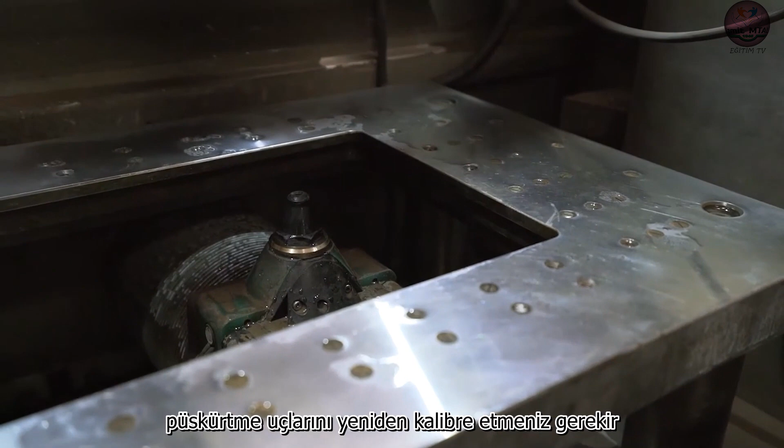Put the nozzle back on. You don't need to wrench on these, these are plastic threads and you can just strip them. So just tighten a little bit and you should be good to go. Anytime that you replace the upper and lower nozzles, you should recalibrate the wire alignment, which we'll go over next.

All right, what we want to make sure is that the wire can thread now that we put the two nozzles back on. If they're not seated correctly, if any of the guides aren't seated correctly, you're not going to be able to get the wire through. So once again, I'm going to turn on the pumps, make sure it's filled up with water before I move anything.

And we're going to try and thread. It threaded nicely, which means that the guides are lined up perfectly and we should be good to go.

Once again though, what we're going to do next is alignment calibration so that we continue to get the tolerances we want. If you don't do the alignment, you might start to degrade your tolerances.

All right, so now what we're going to do is the wire alignment or wire calibration. We're going to use this tool provided by GF Machining Solutions. Right now this is in the stored configuration. What you can do is just take this out, and it's this eyelet. What you want is it facing forward. Tighten that back down, now it's ready to go.

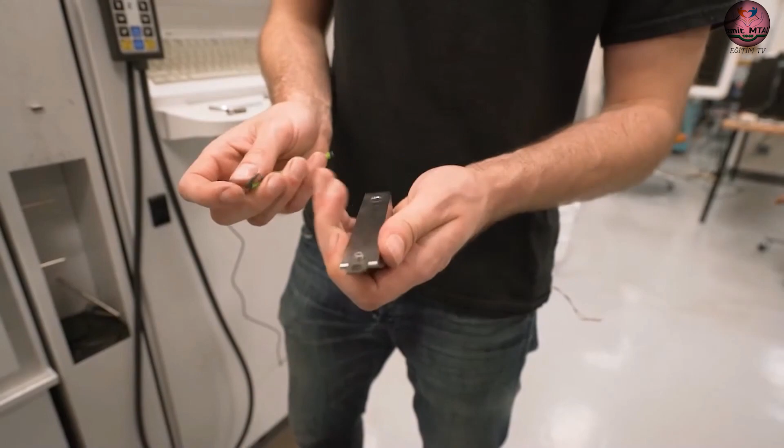So what you want to do is secure this to the back. It doesn't matter where it is, just as long as it's hanging off and it's securely on there.

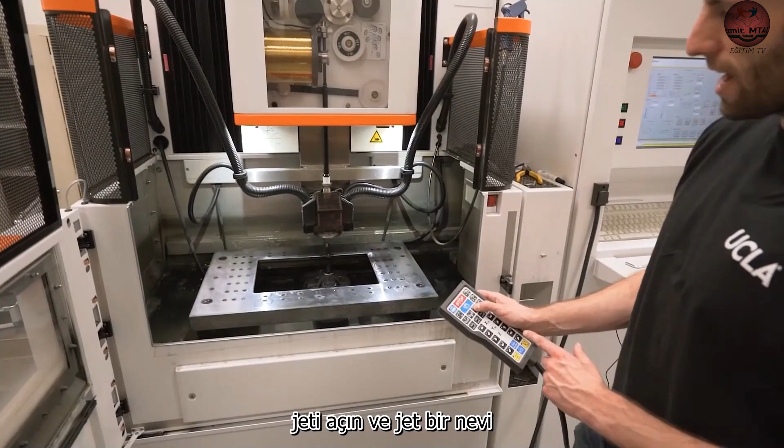And then what you want to do is thread the wire through the eyelet. So what I do to kind of see if I'm aligned, I just turn on the jet, and the jet will tell you where you need to go. So now I can see that it's going through the middle, so I know that I can thread it.

Okay, so now the wire is threaded through the eyelet, and we're going to come back over here. We're going to select here. So here's your normal screen. What you want to do is go over to the maintenance page, and you want to go down to setup, and then the alignment tab.

And the test we're going to run is called GAJ, and it gives you kind of a schematic. This first one, the ZB parameter, is from -- you can see it in the picture -- from the bottom of the table to the middle of the eyelet.

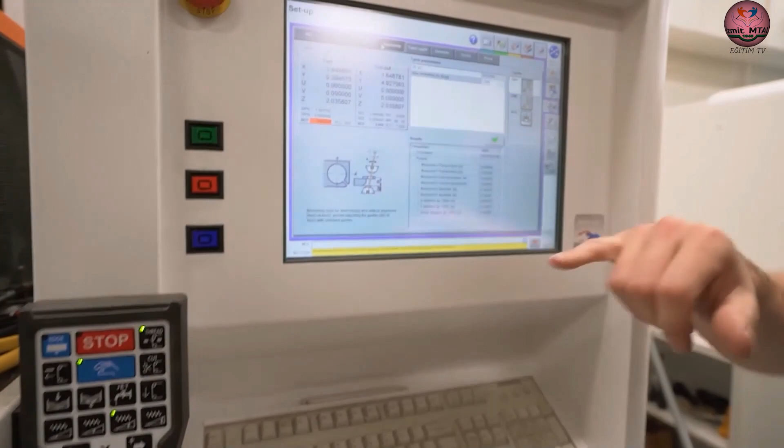So if you haven't set this before, if you get a new calibration tool, you actually need to measure the thickness of the stand and then the thickness divided by 2 of the eyelet and add them together and enter that here. I've used this eyelet before, so I know that 0.815 is correct.

So what we're going to do, we're going to close the door, we're going to hit go.

The first thing it says is the upper head must be around 15 millimeters over the eyelet. This doesn't have to be perfect, but we know that the thing is 0.815. We want to be at about 1.4055. Right now we're at 2.03, so I'm going to lower it.

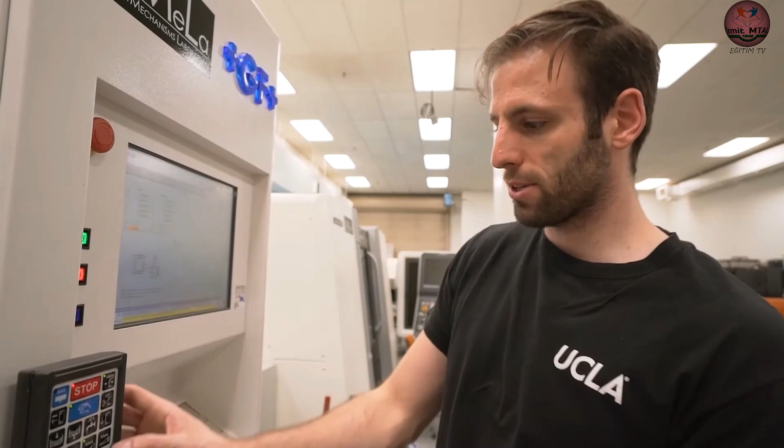Like I said, it says you need to be about there, so this is close enough. I know that we're 15 millimeters over top, so now we can run the rest of the test.

It's going to take about 10 minutes to finish. Once you get back, if you don't have any warnings, that means it was successful and you can go ahead and cut your part.